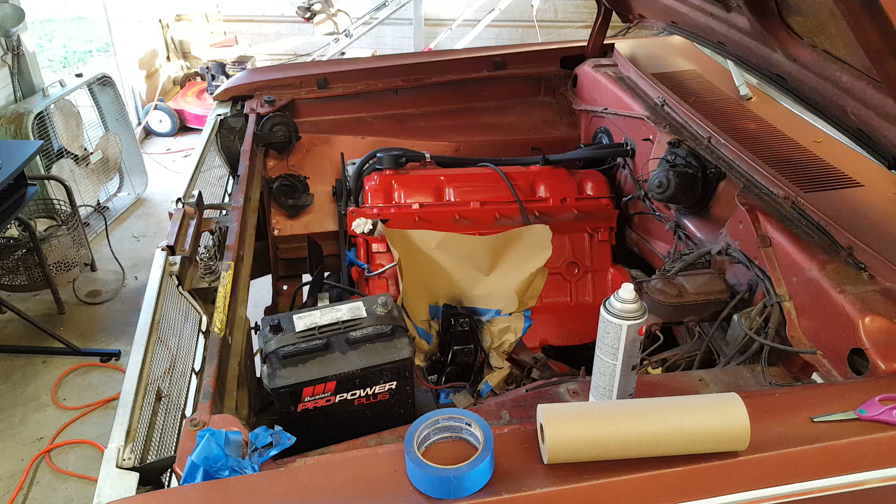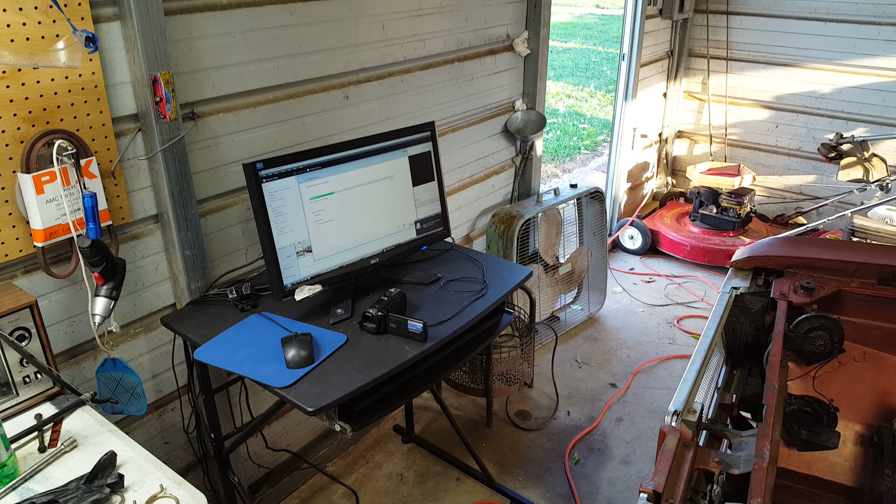Well, I thought while I was standing around watching paint dry, literally, and waiting on the world's slowest editing program, also known as Windows Movie Maker, to grind through a video for you guys coming up, I'd show you a couple things I bought and ordered in and got into the house here. This is a couple Mopar goodies, if you will.

So first thing up is, get out of the sun here, I ordered a service manual for that 87 Grand Fury out there, and this is 1987 service manual, rear wheel drive car, Fifth Avenue, Diplomat, Grand Fury and Newport. I'm not sure why the Newport's on there for 1987. I didn't think they made a Newport in 87. Maybe they did in Canada, but I thought they were called Caravelles in Canada.

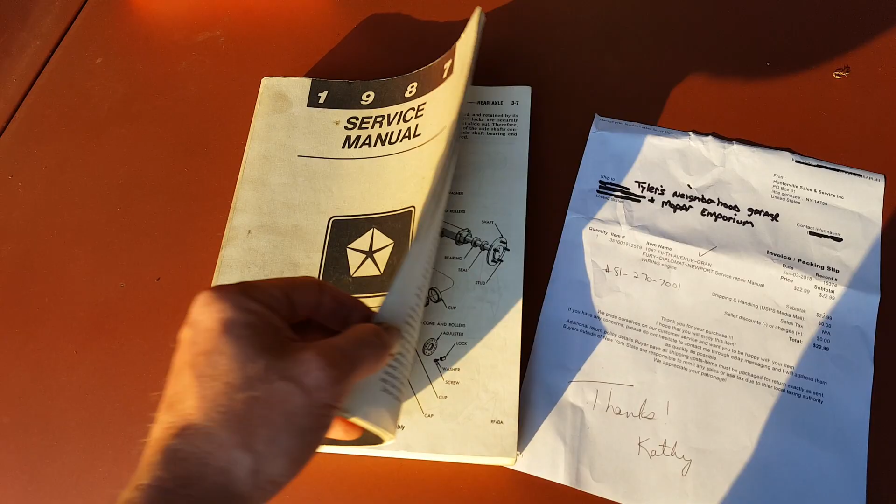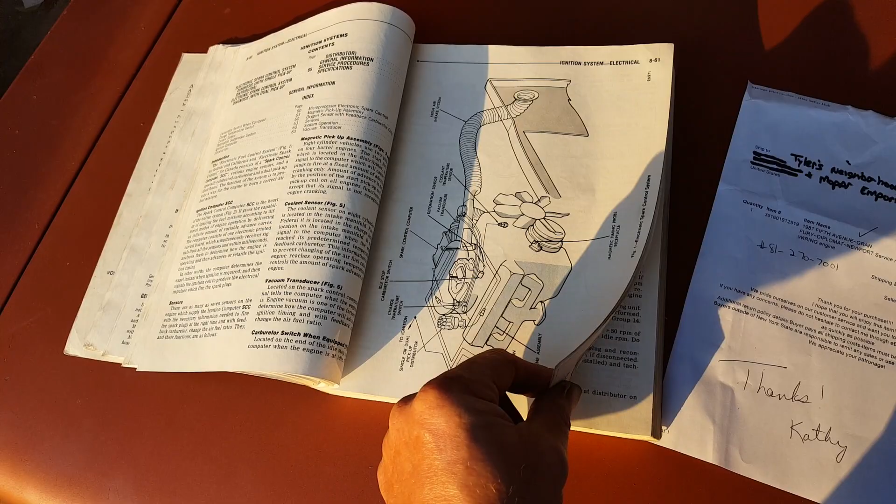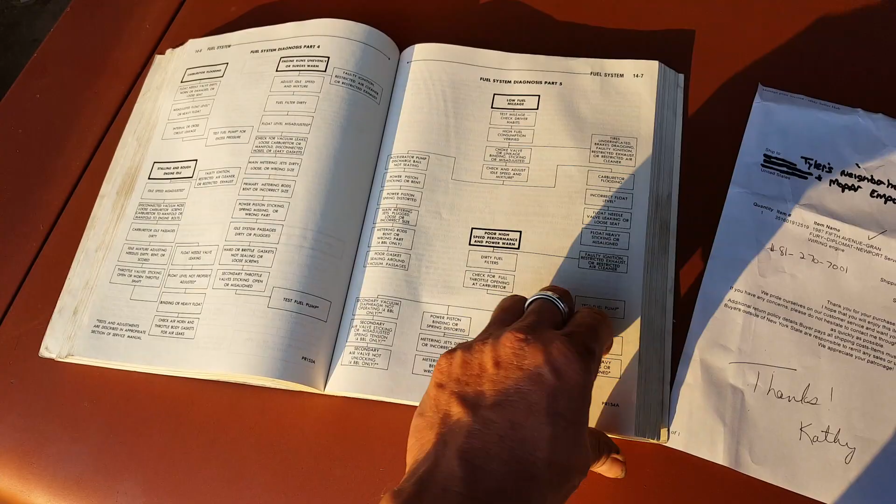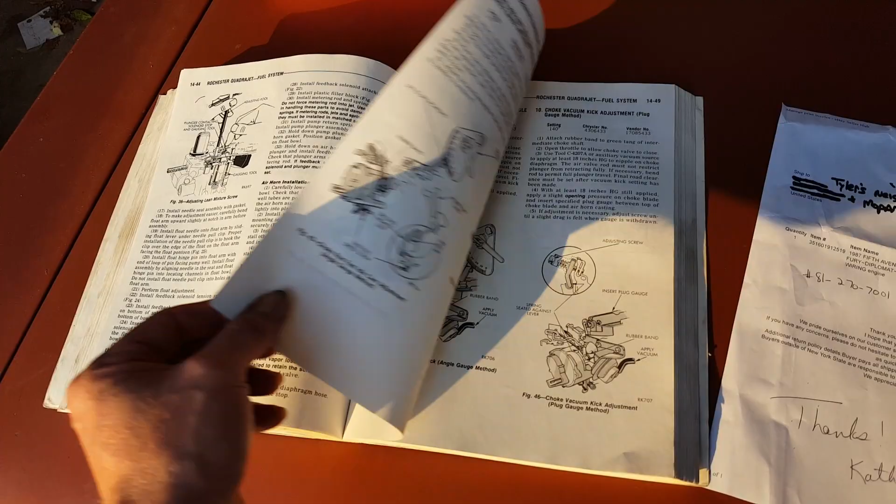Could be mistaken, but anyway, I love these things because they are very detailed and just give you all kinds of good information and specifications how to do any kind of repair on these cars. Electrical, ignition system, brakes, you name it, radio, turn signals, etc. All that. Got wiring diagrams, engine stuff. See there, Rochester Quadrajet. Some of you still may not believe that they ever put those on these. So it gives you the float adjustment, all that.

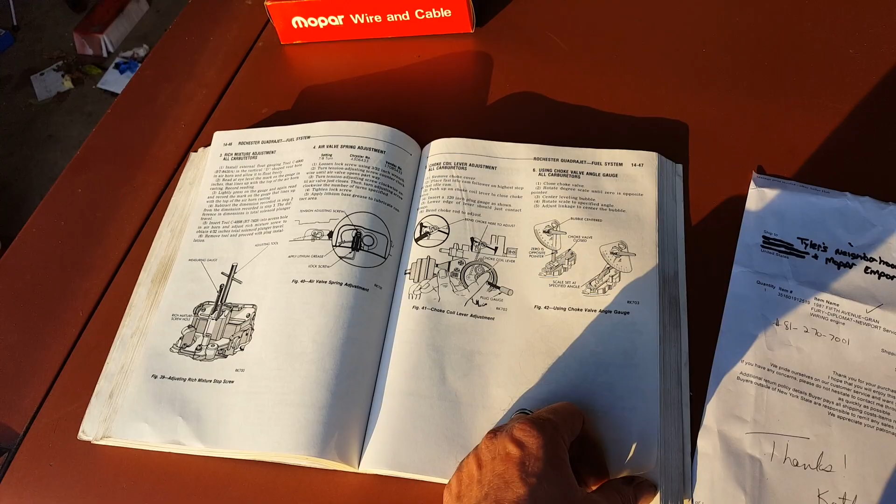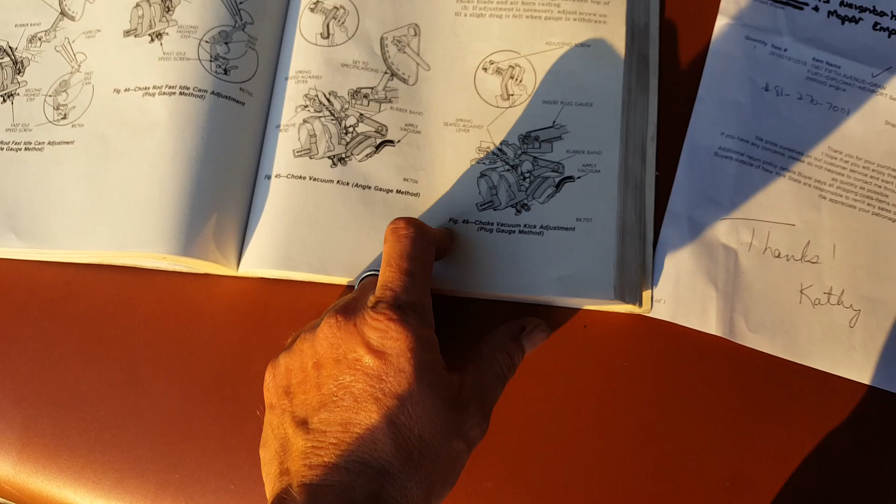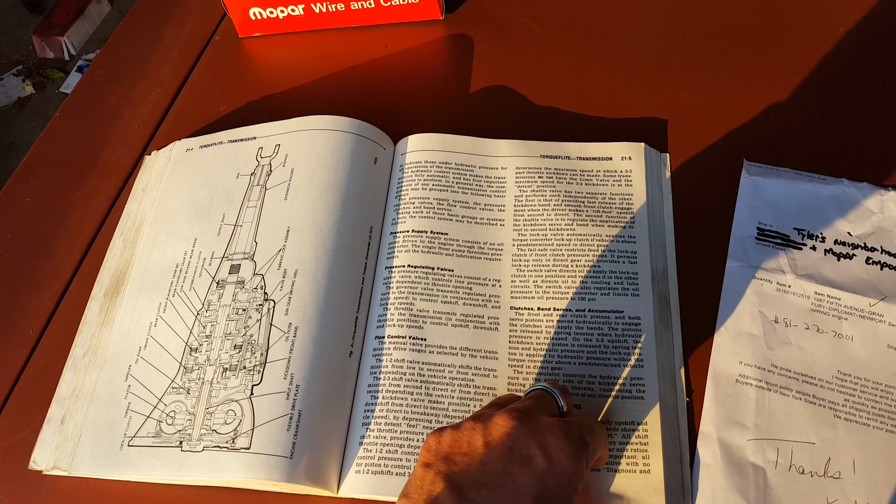It's very detailed. These are much, much better than anything like a Haynes manual or a Chilton's manual. Chilton's manual, I've got a few of them over there somewhere in that stack on that shelf, but I never use them, and I wouldn't normally use them for anything other than to start a fire with if I needed to. That's what I think of them. But anyway, like we got angle gauge method to set vacuum kick. So it's just quite detailed. I love these things. They're well worth the money. So if you ever have an older car, you need to try to get one of these for it, no matter what it is. They make them for anything. GM, Ford, Chrysler, you name it.

So this thing wasn't that much money. Like I said, it was pretty cheap, $22.99. Of course, it came to me here from, I'm not making this up, Hooterville Sales and Service Incorporated. Little Genesee, New York. If you live up there in Little Genesee, New York, or surrounding areas, maybe you're familiar with Hooterville Sales and Service. It's the first I've ever heard of them.

And you're welcome, Kathy. So one thing for sure, I've got some air conditioning issues going on, and then I also have a cruise that's non-op. So that should help me get all that fixed.

And the second thing I bought was for the other car, the green Plymouth out there, the 73. And no kidding about what this is. This is a Mopar, again, Mopar wire and cable. And what this is, is a set of factory replacement plug wires. Custom tailored ignition cable set, 4656, Chrysler Products, 6-cylinder, all 1960 to 75. I think that may be a year incorrect.

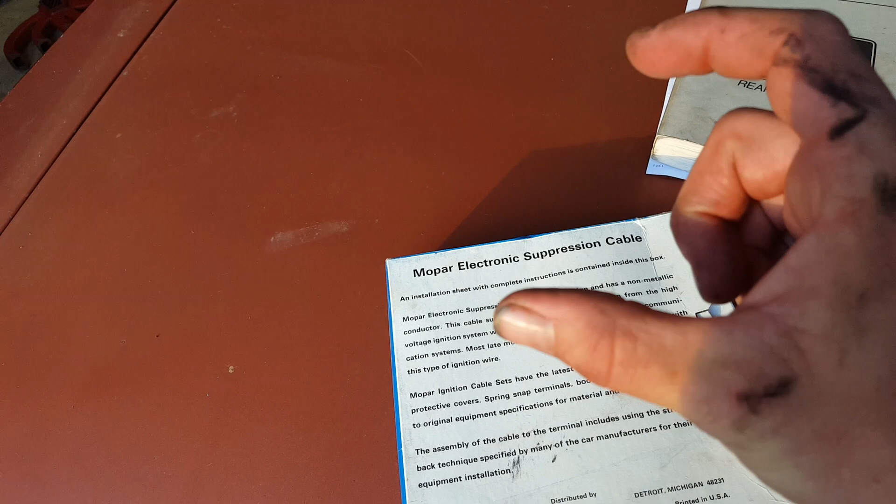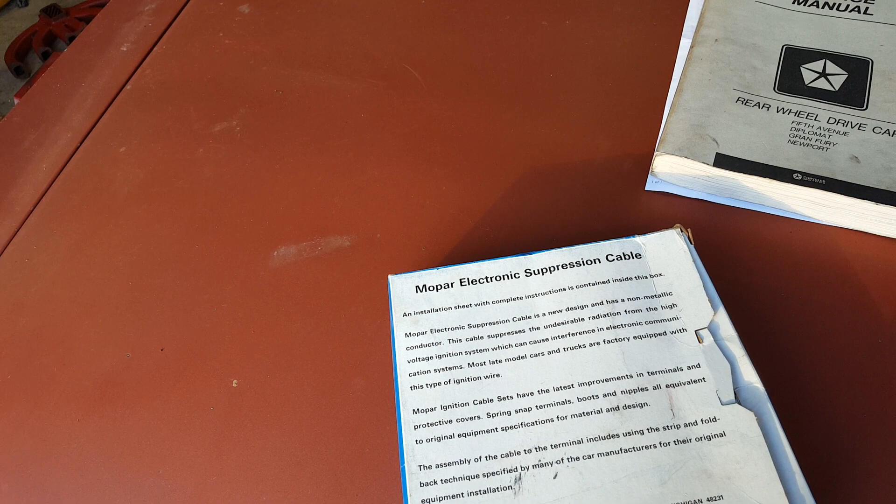I think that may be supposed to be 1960 through 1974, because I believe that the difference in these is that through 74, I think they use the spark plug tubes in the heads that you have a little seal. You're fixing to see those, but they use that type, and then the later ones use what they call the peanut heads or something like that, some crazy name. Anyway, they didn't have the tubes anymore. The spark plug wires just had a normal end that just stuck on there with those seals.

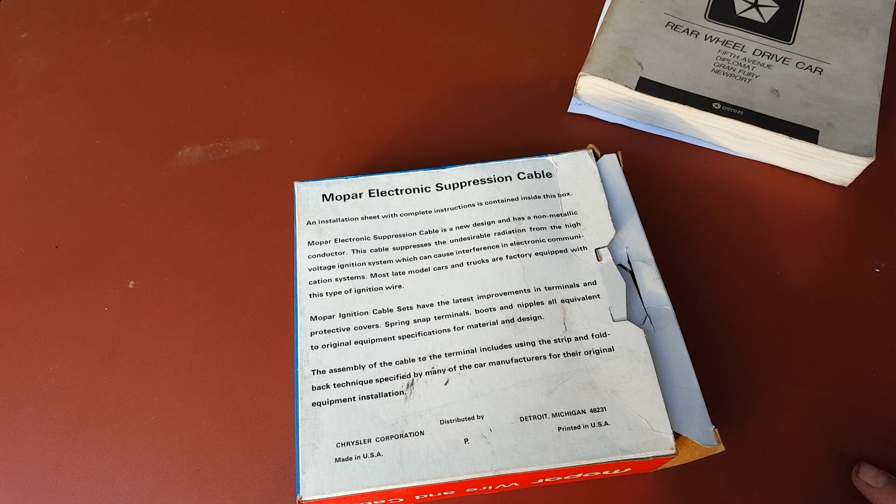So it was just a thing to eliminate an oil leak. But what this would be, if you took yourself back about 40 years to 1978, and you had a 1973 Plymouth Valiant or a Dart or something like that that was coming up due for a tune-up, and you wanted a set of plug wires, you'd just hop in the car and swing by your local Mopar dealer, Chrysler, Dodge, Plymouth, whatever the case may be, and you go to the parts counter and say you need a set of plug wires, and this is what they gave you.

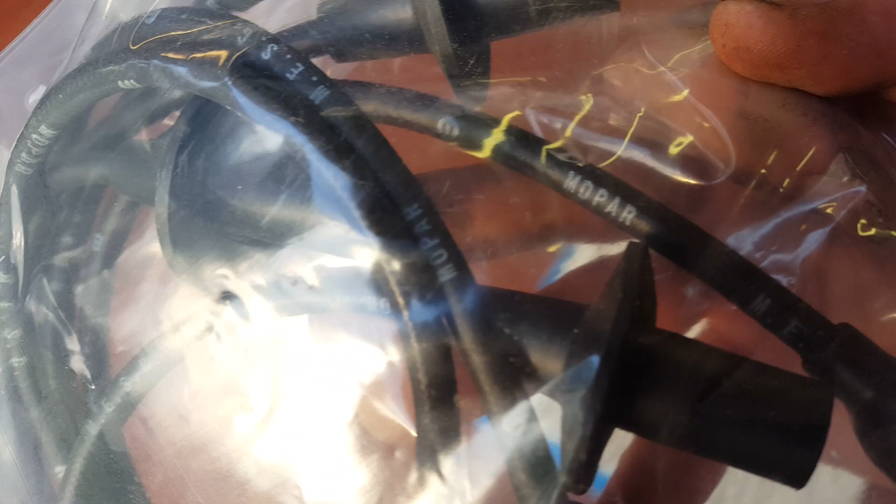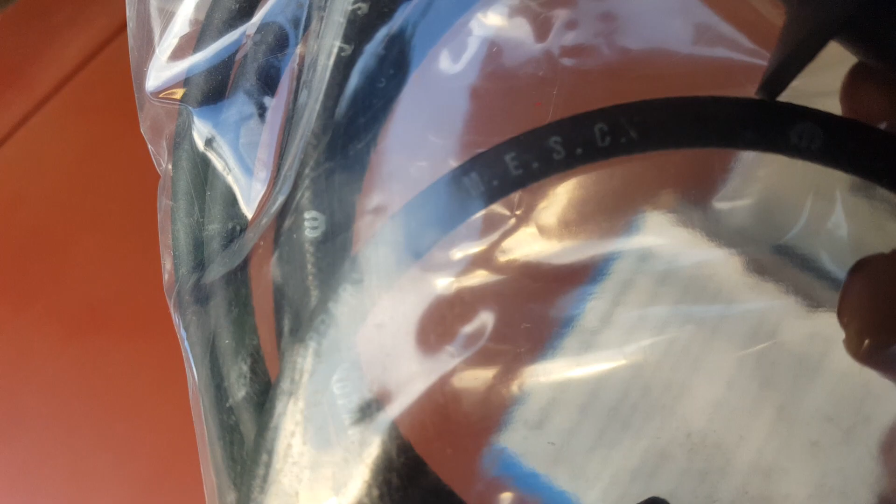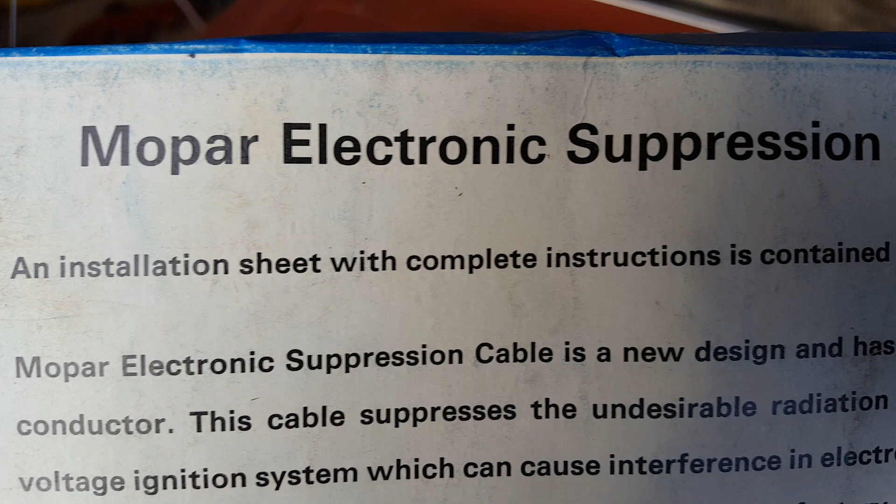These have evidently never even been out of the bag, so they are Mopar. I don't know how old these are actually. They've got a later Mopar symbol on them, I think, but there's no date code on them. All they say is MESC. But anyway, I'm about to crack them open and put them on here. Mopar electronic suppression cable. An installation sheet with complete instructions is contained inside this box. That's a fib, it's not.

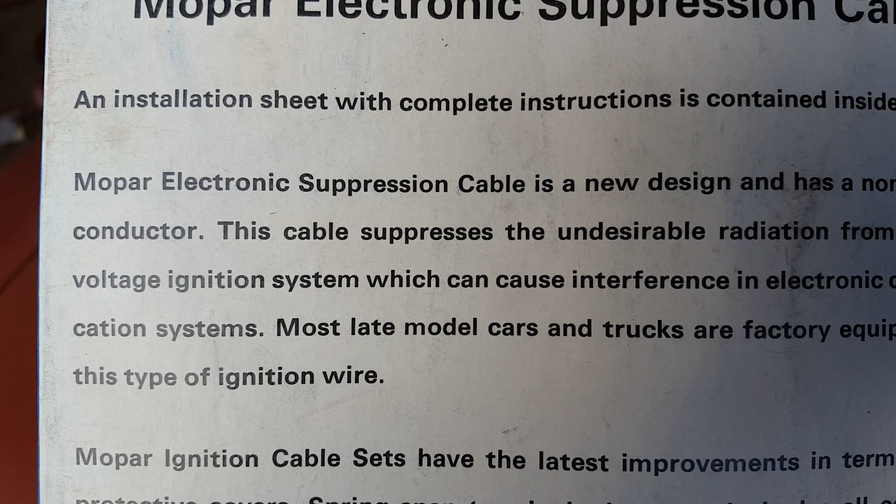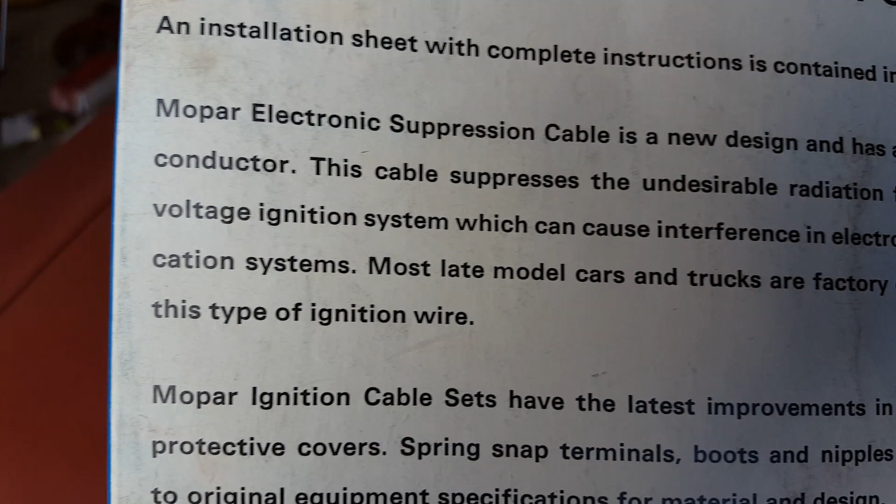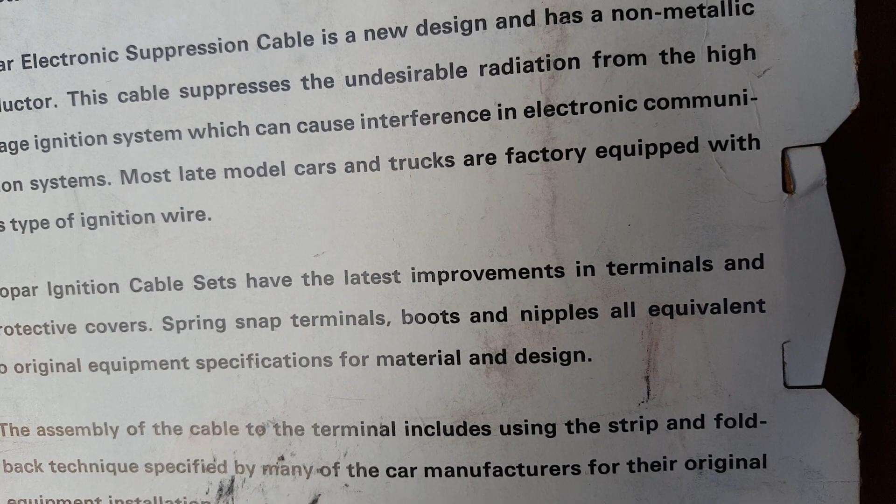Mopar electronic suppression cable is a new design and has a non-metallic conductor. This cable suppresses the undesirable radiation from the high voltage ignition system, which can cause interference in electronic communication systems. Most late model cars and trucks are factory equipped with this type of ignition wire. Mopar ignition cable sets have the latest improvements in terminals and protective covers, spring snap terminals, boots, and nipples, all equivalent to original equipment specifications for material and design.

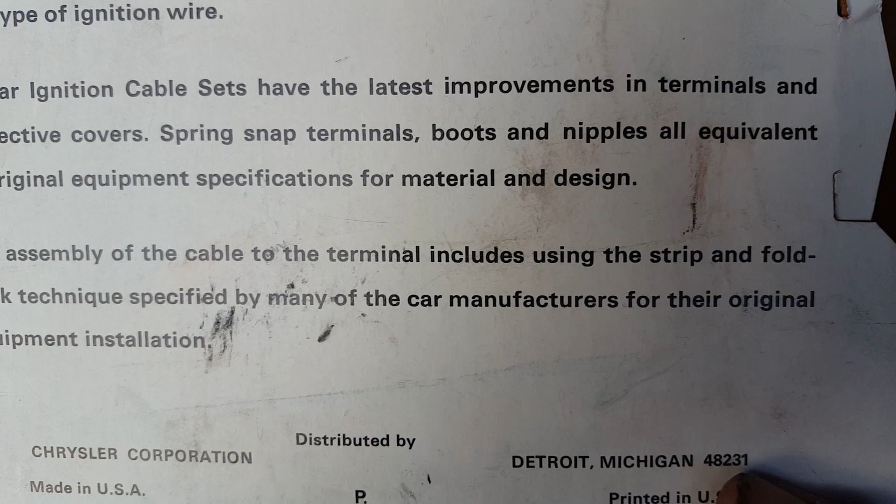The assembly of this cable to the terminal includes using the strip and fold back technique specified by many car manufacturers for the original equipment installation. Made in USA, Chrysler Corporation. So these were about $49, and if you go on your local parts reseller like AutoZone or Advance and look up the price of one of these crappy replacement cable sets, you're not too far off on the price these days, and pretty much you have to order them anyway.

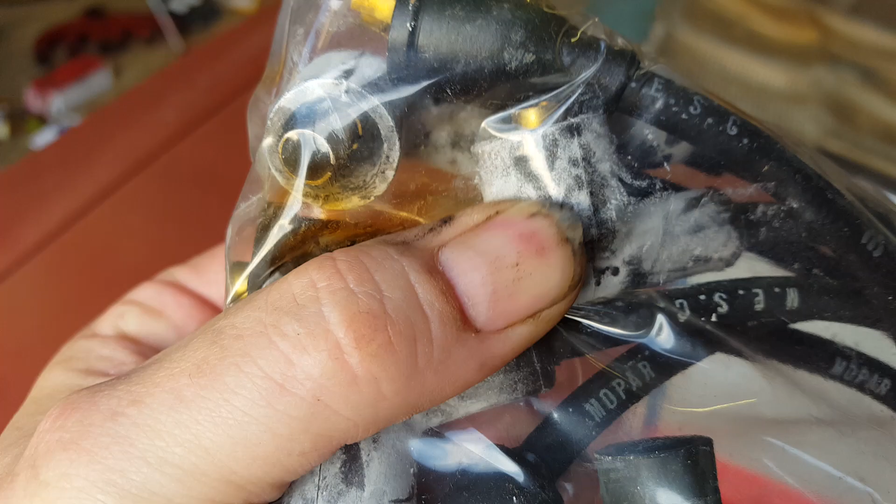You'll notice these got a little bit of, I don't know what that is, a little protecting, I guess, turned a little chalky, but they got nice brass terminals, and some of these that go on the distributor cap are actually 90-degree ends. They may all be that way, actually. No, they're not. There's a few straight in, but anyway, that's a neat way that's done there. So these are the seals I was talking about.

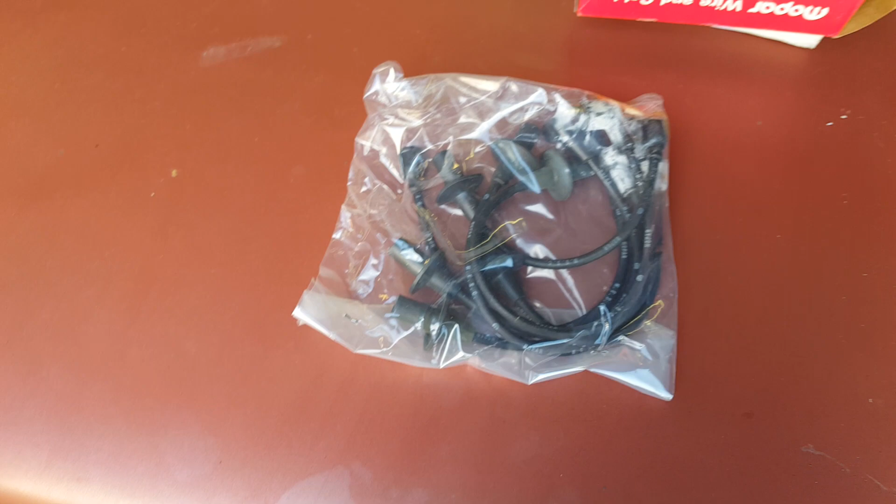So long story short, as long as this stuff's still floating around out there, there's no need, if you have one of those older cars, to go buy this new crap. You can still find a fair amount of ignition parts and stuff like that still original. This is where they've cleaned out a dealership and still got some of the stuff left. So go looking for this stuff. If you got an older car or truck and keep it as original as possible, you can go find some of this stuff and use it. It's good quality stuff.